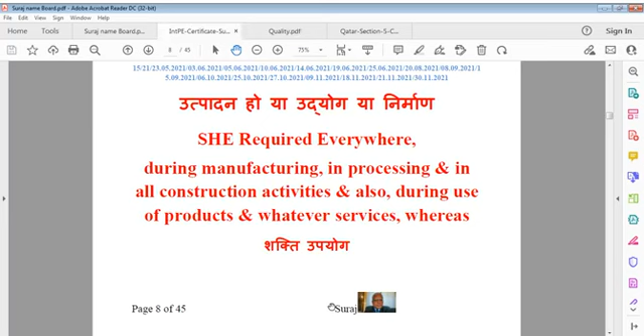So why can I not question quality? I was talking about quality, and these are my credentials, and this is a file of quality which is required everywhere. I was talking about concrete. That's very important. I say I don't repeat the title, it's already there.

That is civil field engineering, and of course quality, safety, contracts, designs, methods, everything is involved in that. That is construction, that is civil, that is engineering world. And I am surprised that these service providers don't have any engineering stamina in them. They're only interested in money.

It may be Airtel or it may be other service providers. They don't care for anything because they are not professionals. I can plainly say professionalism has disappeared from the scenario. It is in our country. I think the same happens everywhere because people are the same all over the world.

And I am blaming everyone for this. I don't blame owners because they are money oriented. There is no serious class among these people, IT people. They don't have any realization of problems of users, and they don't care for them. User is bound because user has no alternative, and they keep on extracting money from users. You may know that these service providers can raise rates of services without even telling you.

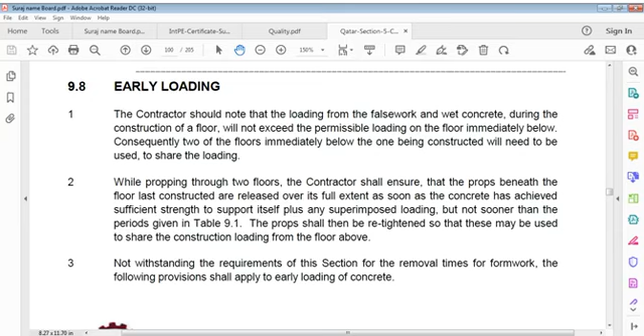Notwithstanding the requirements of this section for removal times of formwork, the following provisions shall apply to early loading of concrete. At no time shall concrete be subject to loading, including its own weight, which induces a compressive stress in excess of 0.33 of actual compressive strength. This means we cannot exceed 1/3 of the load which it can digest.

It says concrete shall at no time be subject to load, including its own weight, which induces a compressive stress in excess of 1/3 of actual compressive strength of concrete at time of loading, or 1/3 of specified 28-day characteristic strength, whichever is lower. For purpose of this provision, assessment of strength of concrete and stress produced by loads shall be subject to agreement with the engineer.

So we know 28 days is the conclusive strength, let us say 30 Newton. So we cannot allow more than 1/3, that's 10. So concrete shall at no time be subject to load, including its own weight, which induces a compressive stress in excess of 1/3 of actual compressive strength of concrete at time of loading, or 1/3 of specified 28 days strength. So you got this point.

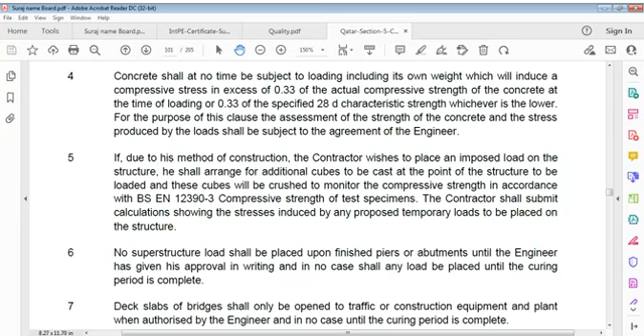Deck slabs of bridges shall only be opened to traffic or construction equipment and plant when authorized by the engineer, and in no case until the curing period is complete.

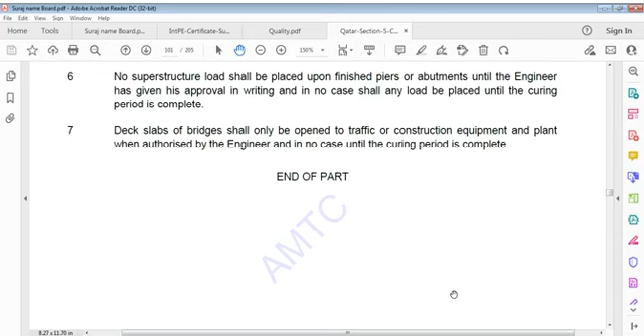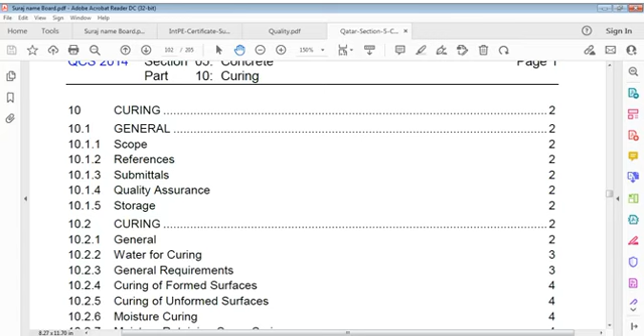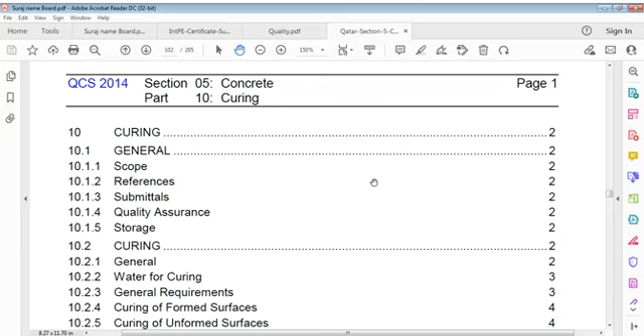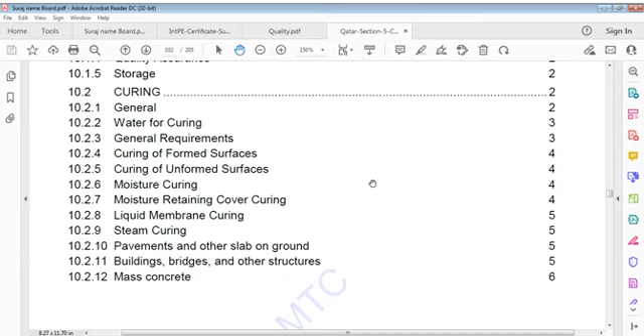Now we go to curing. In this section we have scope, references, submittals, quality assurance, storage, and curing itself. Under curing general we have curing of formed surfaces, curing of unformed surfaces, moisture curing, moisture retaining cover curing, liquid membrane curing, steam curing, pavements and other slabs on ground, buildings, bridges and other structures, and mass concrete.

So let's say what we talk of here. This part covers requirements for curing of concrete, and related chapters in this code are as follows: Part 1 general, Part 4 water, Part 6 property requirement, Part 15 hot weather concreting.

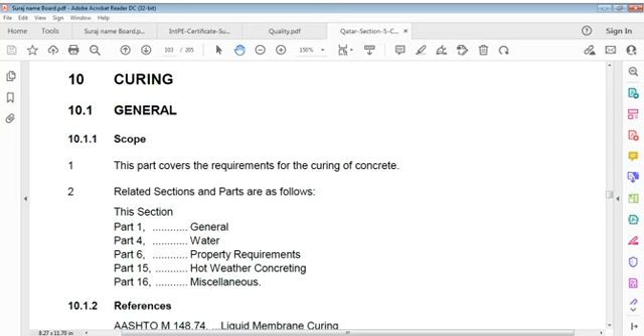That is liquid membrane curing. Of course I'm not naming codes, you can see yourself what's written on screen. Then guide to concrete curing, specification for liquid membrane forming compounds for curing concrete, and method of test for curing compounds for concrete, quality, organization, management systems, and that is requirement.

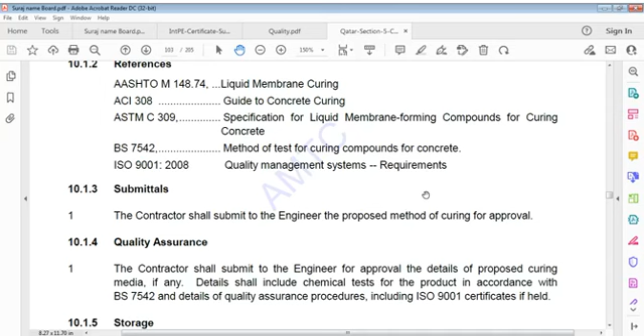Contractor shall submit to engineer for proposed method. Quality requirement is contractor shall submit to engineer for approval details of proposed curing media. If any, details shall include chemical tests for product in accordance with requirement of BS, and details of quality assurance procedures.

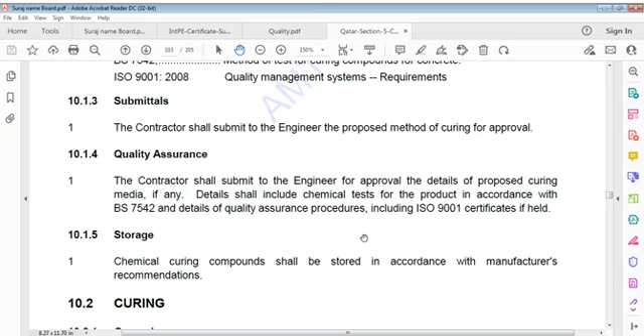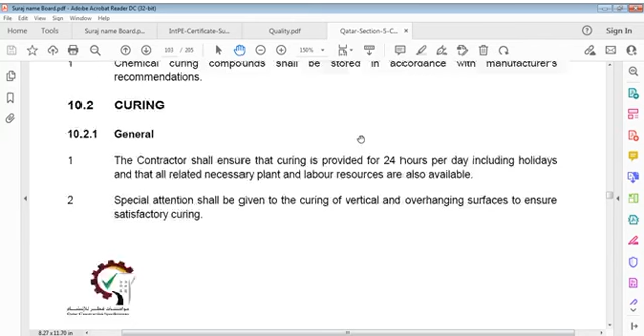Chemical curing compounds shall be stored in accordance with manufacturer's recommendations. Curing.

Contractor shall ensure that curing is provided for 24 hours per day. This means non-stop, no gap, 24 hours per day including holidays, and all related necessary plant and worker resources are also available. Meaning whoever works on that shall ensure curing is provided for 24 hours per day, including holidays, and that all related necessary plants and worker resources are also available.

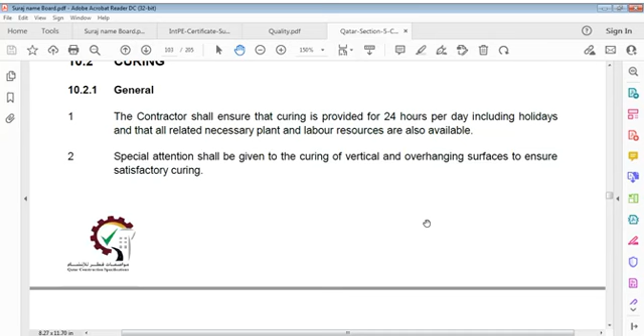Special attention to be given to curing of vertical and overhanging surfaces. Again, when I say contractor, this means not exactly contractor, but whoever works there.

I mean that, you can say signals are down, zero zero. Thank you Airtel, thank you very much for serving me with zero signals and sometimes for maximum signals. Both ways, you are great.

Contractor or person working on concrete shall adopt curing measures that preclude the possibility of thermal shock to concrete during curing, which can be achieved by ensuring that the temperature of water used for curing does not differ from that of concrete by more than 15 degrees Celsius.

This is a point here. Contractors shall adopt curing measures that preclude possibility of thermal shock. We have to avoid the possibility of thermal shock to concrete during curing, by ensuring that the temperature of water used for curing does not differ from that of concrete by more than 15 degrees Celsius.

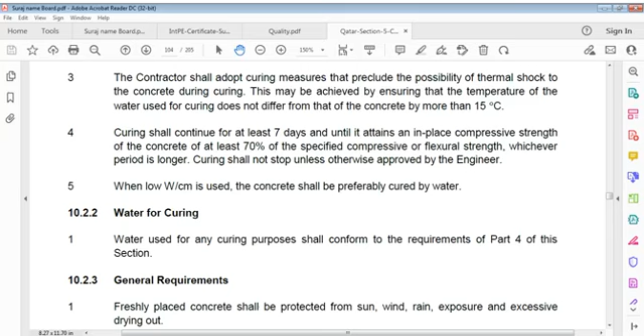Now, general requirement: freshly placed concrete shall be protected from sun, from wind, from rain, from exposure, and excessive drying out. So this is where all natural agents are considered.

Concrete shall be cured for a period of time required to obtain full specified strength, but not less than 7 to 14 consecutive days. I am adding up to 14 because 7 is not adequate when you permanently include supplementary cementing material, which are pulverized fuel ash or GGBS, ground granulated blast furnace slag, or microsilica itself, also called silica fumes.

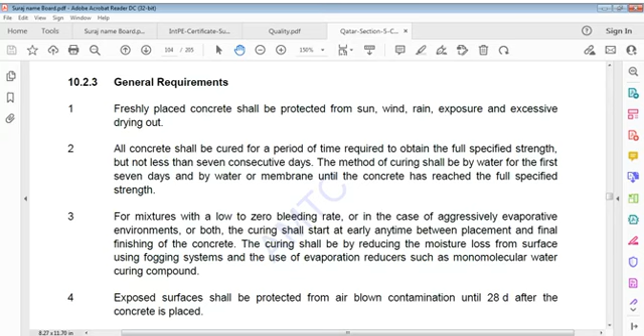Method of curing shall ensure that sufficient moisture is present to complete hydration of cement, subject to the approval of the engineer.

Method of curing shall not disfigure permanently exposed surfaces, shall not affect the bonding of subsequent coatings, which means plastering or rendering, and shall not increase the temperature of concrete. When you say bonding of subsequent coatings, this can include direct application of paint also. If you say we don't do finishing works on that, we don't do plastering or rendering, then in that case we have to cure the surface differently. That is what is meant by method of curing.

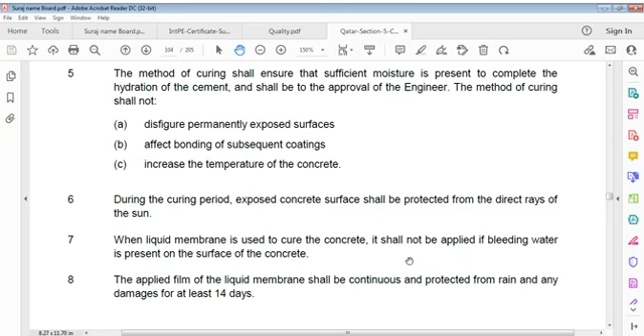Formed surfaces, including underside of beams - beam soffits or girders - and supported slabs shall be cured by moist curing with the forms in place for the full curing period, or until forms are removed.

When forms are stripped, curing shall continue by whatever approved method. When liquid membrane curing is used, it shall be applied immediately after removing shutters. In such cases, the concrete surface shall be prepared prior to application of the membrane as recommended by the manufacturer.

When liquid membrane curing is used, it shall be applied immediately after formwork is removed. In such cases, the concrete surface shall be prepared prior to application of the membrane as recommended by the manufacturer. Water curing is not required when liquid membrane is used.

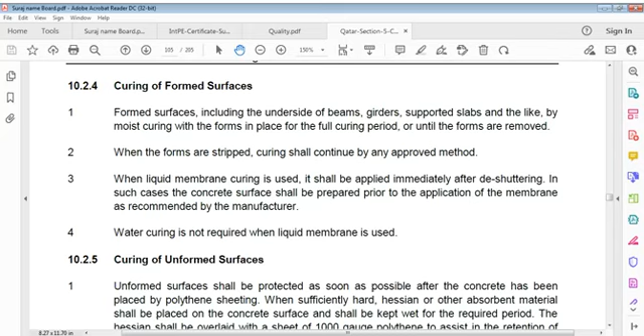Curing of unformed surfaces - we talked of formed surfaces, now unformed surfaces shall be protected as soon as possible after concrete has been placed, by polythene sheeting. You have to cover that surface using a polythene sheet.

When sufficiently hard, Hessian or other absorbent material shall be placed on the concrete surface and kept wet for the required period. The Hessian shall be overlaid with a sheet of 1000 gauge polythene to assist in retention of water.

Alternatively, a curing method approved by the engineer may be used. So for curing unformed surfaces, immediately you can use a polythene sheet so that moisture remains. The unformed surface shall be protected as soon as possible after concrete has been placed, using a polythene sheet for that purpose. And when it is sufficiently hard, we have to apply Hessian, or saturated Hessian, or other absorbent material on the concrete surface and keep it wet for the required period.

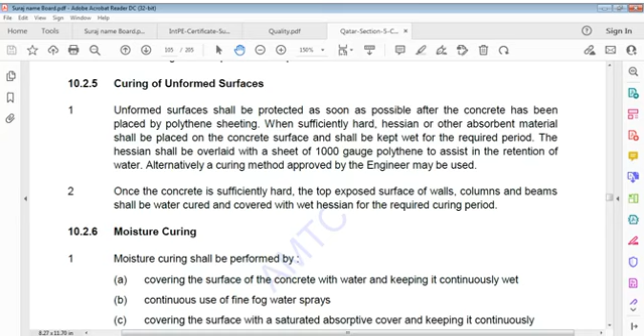Top exposed surfaces of walls, columns and beams shall be water cured and covered with wet Hessian for moist curing.

Moist curing shall be performed by covering the surface of concrete with water and keeping it continuously wet.

Continuous use of fine fog water sprays.

Covering the surface with saturated absorptive cover and keeping it continuously wet. You can use burlap, cotton mats, and other absorbent materials to hold water on horizontal and vertical surfaces.

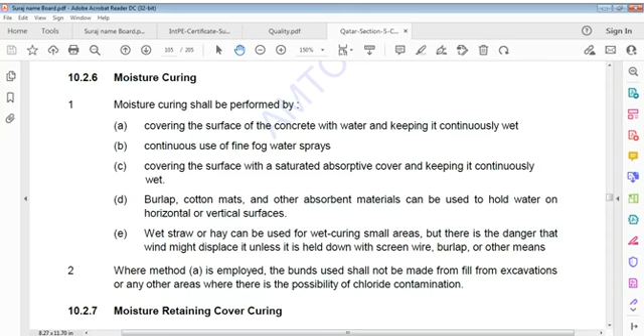Moisture retaining cover curing: the concrete surface shall be covered with a suitable absorptive covering such as wet hessian. The absorptive covering shall be overlaid with a 1000 gauge polythene sheet. The cover shall be in the widest practical widths and shall have 100 mm side and end laps.

Penetration or tear in the covering shall be repaired with the same material and made waterproof.

So again, the concrete surface shall be covered with suitable absorptive covering such as wet hessian, overlaid with a 1000 gauge polythene sheet. The cover shall be in the widest practical widths with 100 mm side and end overlaps. Penetrations or tears in the covering shall be repaired with the same material and made watertight.

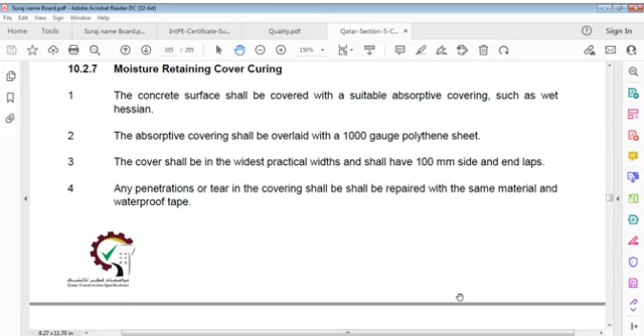Liquid membrane curing shall be in accordance with the requirements of BS 7542, ASTM C309 or C1315, when tested at the rate of coverage used on the job. ASTM C156 shall be used as a test method to evaluate the water retention capability of liquid membrane forming compounds.

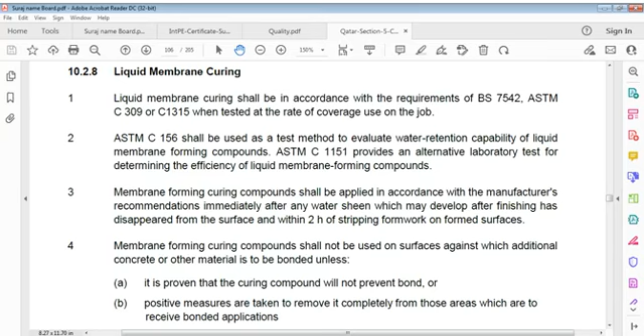ASTM C1151 provides an alternative laboratory test for determining the efficiency of liquid membrane forming curing compounds.